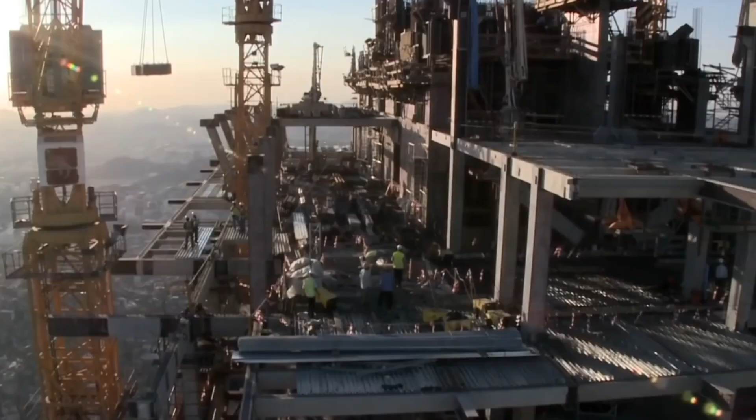The Makkah Royal Clock Tower isn't just a hotel, it can't be. It's located in the heart of one of the most culturally significant cities in the world. Every year up to 3 million Muslims travel to Mecca to complete a pilgrimage known as the Hajj. Those completing the Hajj circle around the Kaaba 7 times. It's an ancient ritual that every Muslim must complete at least once in their life.

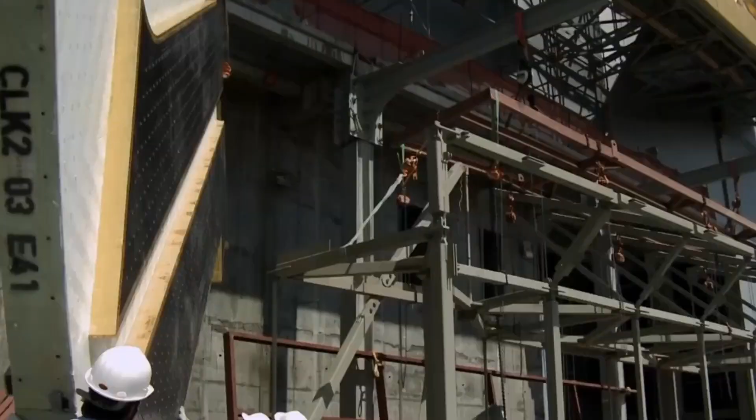This site is thousands of years old, extremely delicate, and constantly crowded. And just a few hundred meters away, across the road, was where this enormous hotel was to be built. This is far from a simple construction site. It's right in the center of Mecca city. You know, inside the first ring road, which is really the most congested area in Saudi Arabia, then the center of Islam. All Muslims want to go there. You have the holy mosque with the Kaaba in the middle and right opposite.

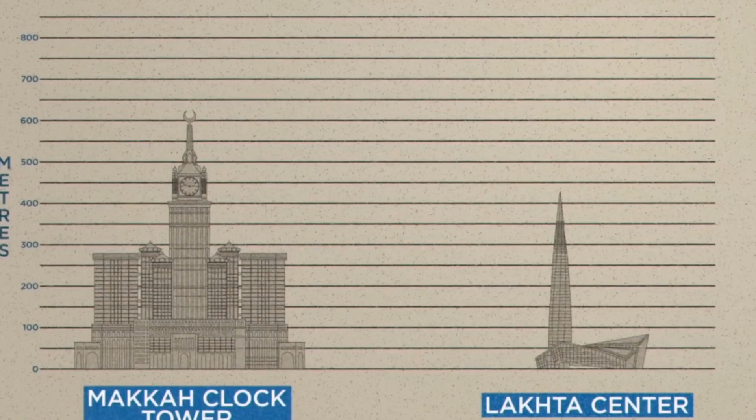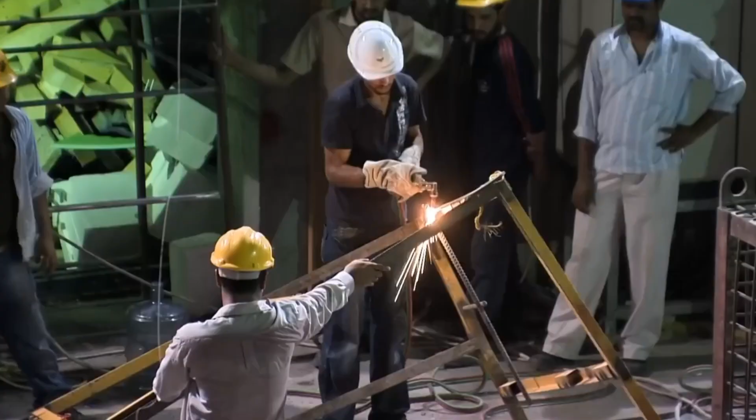The religious tourism market is the second largest source of income for Saudi Arabia after hydrocarbons. It contributes some $12 billion annually to the kingdom's economy. This means that Mecca has the largest number of hotel rooms in the Arab world, far surpassing Dubai. It really then comes as no surprise that this enormous hotel would be constructed here.

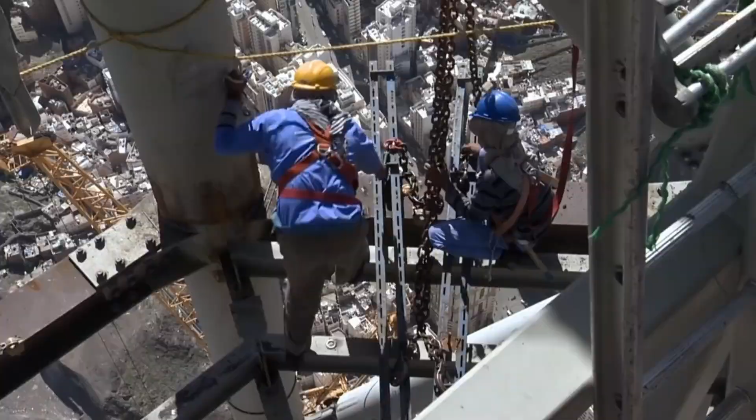Due to the nature of it sitting so closely to the Kaaba and in this very, let's say, sensitive environment, the client reached out to us and wanted to elaborate with us ideas on bringing more meaning to the building. The hotel needed to be more than just a commercial building, because of its location. It needed to be something spiritual. We started thinking about what such a building could stand for. And then one of the ideas that was created in those several meetings and brainstorming was that the main tower could function as the minaret of Mecca.

It was planned and would have been the highest building in the world. The hotel was originally supposed to be only 450 meters high, which would have still made it the tallest building in the world at the beginning of its construction in 2002. Upon deciding to transform it into a grand minaret, the height was then extended to 600 meters. Burj Khalifa was not built yet. It was also in planning, and they, of course, once it was clear that this tower would be 600 meters, they raised theirs to 800 meters and took the record for that one.

But making this hotel into an enormous minaret wasn't enough. The client wanted even more. Of course, timekeeping is essential. There's 5 prayers during the day in Islam, and they all happen to a certain time. Time plays an important role in Islam. There is, of course, the call to prayer that happens 5 times a day. The adhan is the first call to prayer and is usually made from the top of a minaret.

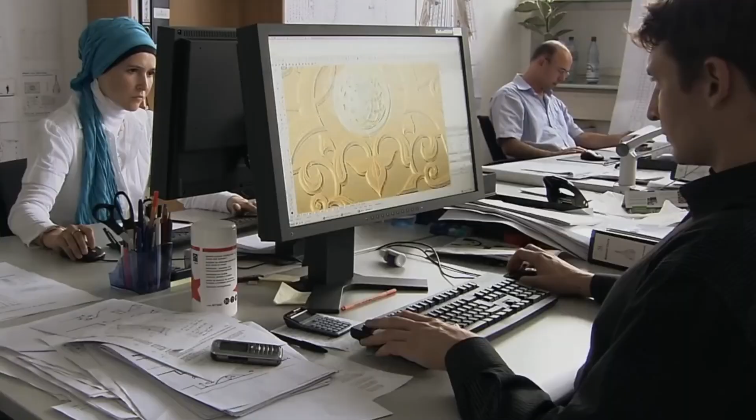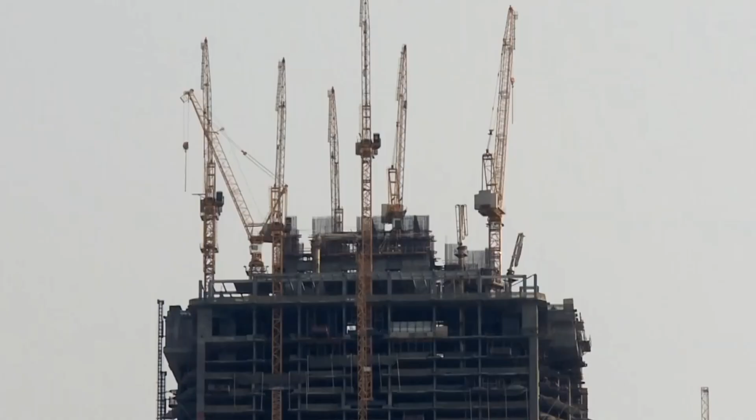The idea of then making this building into a clock tower as well came very naturally. This clock would establish a new second time standard in addition to Greenwich Mean Time. All over the world Muslims would be able to know the precise atomic time in Mecca. This would allow Muslims to begin holidays and special occasions like Ramadan simultaneously, regardless of where they are on earth.

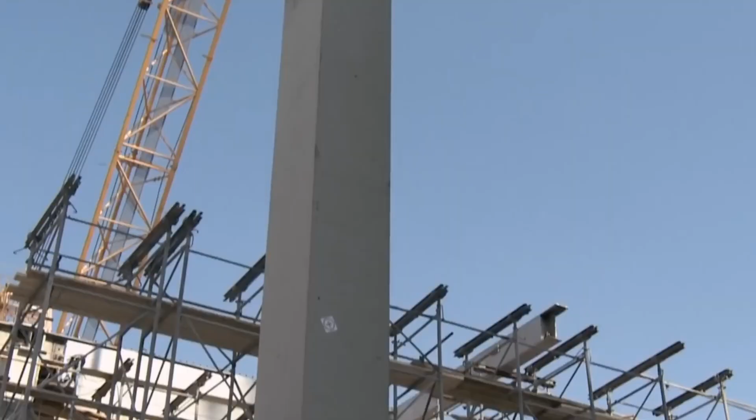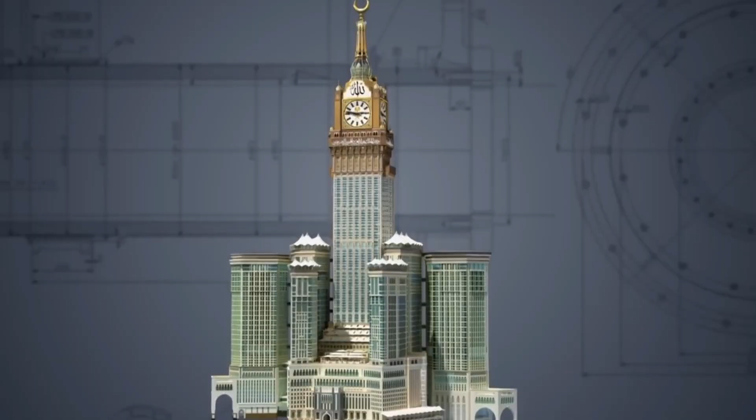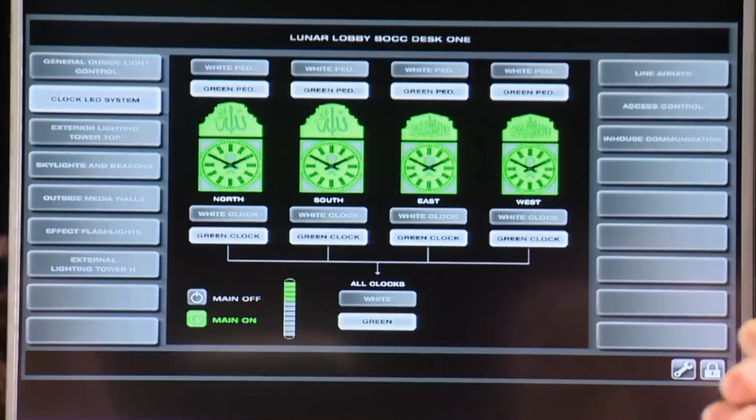There was just one huge problem: half of the building was already built. By the time the Saudis wanted to extend the height and add the clock tower, half of the hotel was completed. This meant the foundations were well and truly laid into the ground and had been designed to accommodate a 450-meter high skyscraper above them, not a 600-meter one. This limited the weight of the building to just 82,000 tons. For contrast, Shanghai Tower, which rises to a comparable 632 meters, weighs 575,000 tons. So we went into checking the foundations.

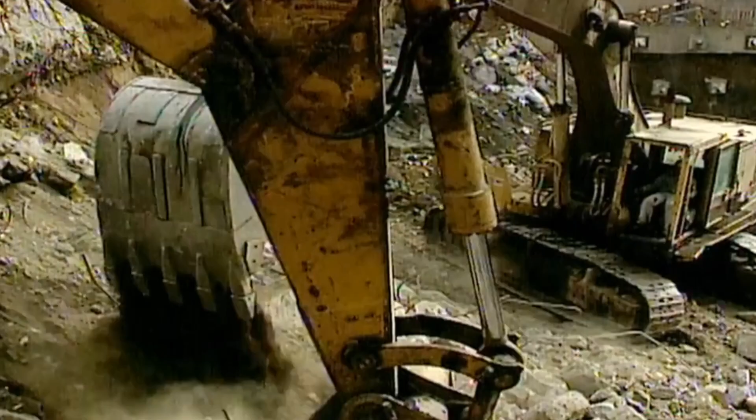How were the foundations laid out? How were they calculated? What forces were they allowed to hold? And we saw that they have a lot of reserves. And that's the typical measure in Mecca, that all the buildings have a lot of reserves, just for the sheer fact that there are so many people moving through the city and they want to be on the safe side.

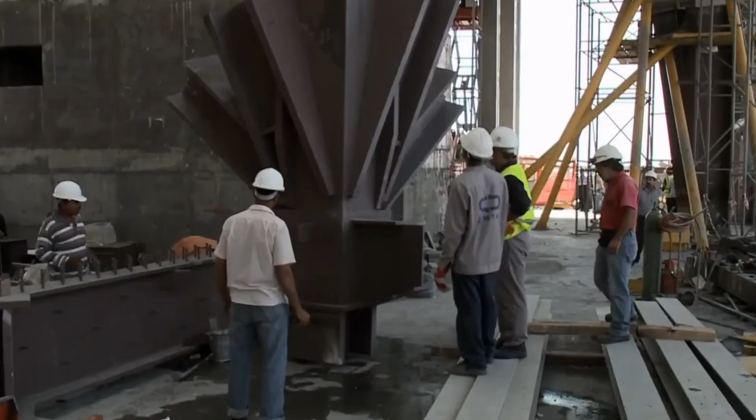We started developing, then, an ultra-lightweight structure that could be placed on top of this concrete tower. The engineers and designers needed to create a tall, lightweight, but strong structure to put on top of the existing hotel. Fortunately, history had already solved this problem.

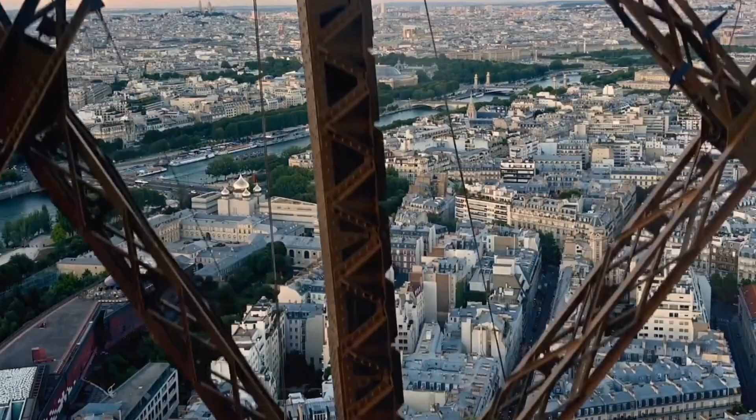Rewind the clock to 1889 and Gustave Eiffel was planning to build the tallest man-made structure in time for the World's Fair. To build it high and fast, and to ensure it didn't sink under its own weight, he came up with the now iconic wrought iron framework structure. This allowed the tower to soar to new heights and redistributed its weight downwards to its base.

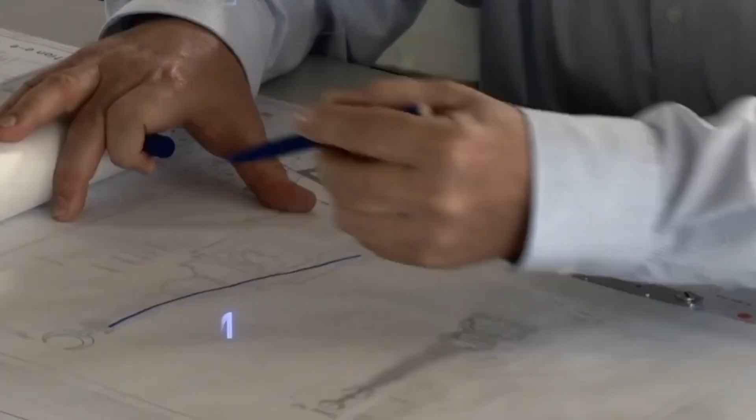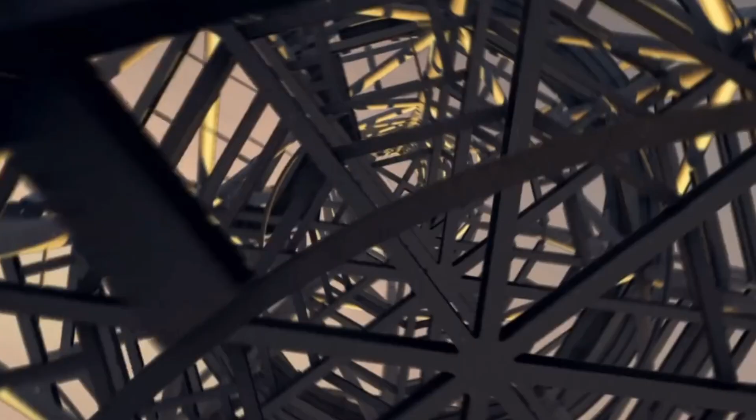The engineers of the clock tower began sketching their design by placing the Eiffel Tower on top of the existing hotel. They used high-strength steel and concrete instead of wrought iron, but kept the idea of a framework structure that grew more slender as it rose, like the trunk of a tree, and kept the same engineering principles from the Eiffel Tower. They would then build their clock and minaret around that framework structure. This lightweight structure was then placed on 5 transfer slabs on the top of the hotel.

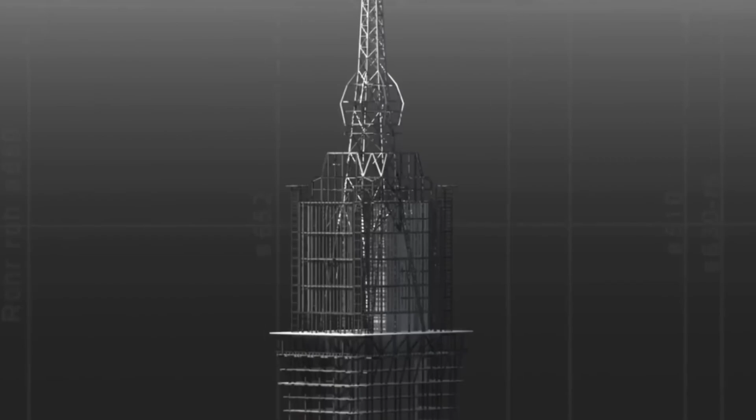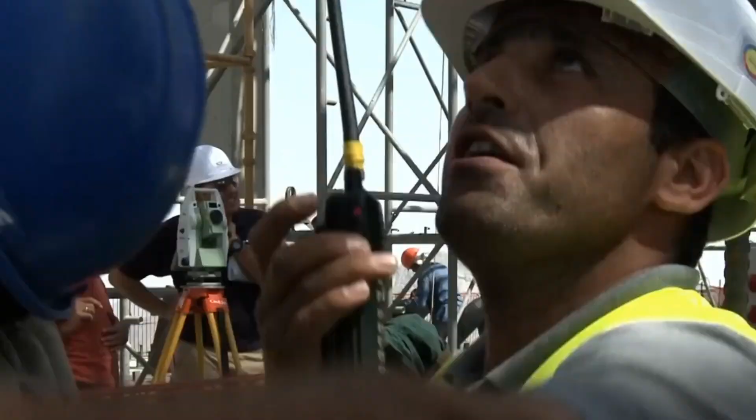There were of course a number of limitations that came with this approach. The distance between floors, for example, had to be far higher than normal. I mean, behind the clock, one floor level is about 12 meters. You could not go with typical floors, the weight would have been exceeded. And then also the floors are cut out. There's a big void in those floors.

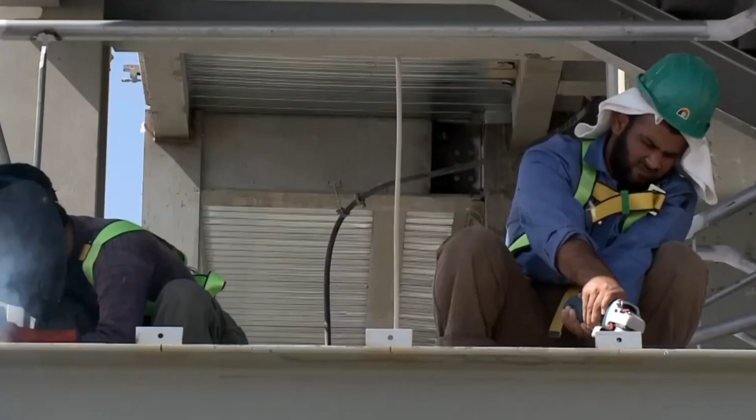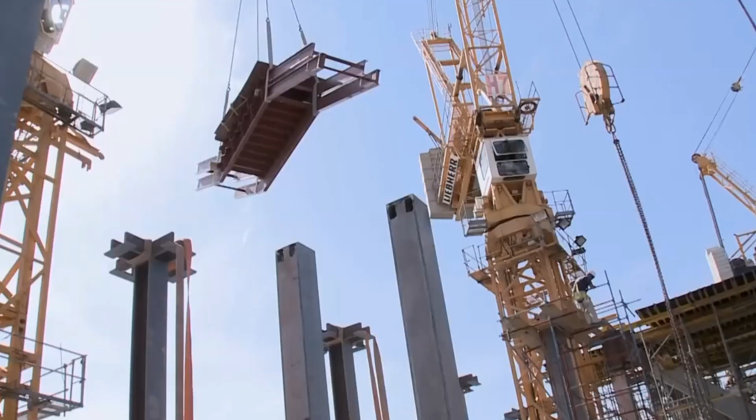The voids, which made the floors weigh less, were then incorporated into the design and used to display large exhibits and artworks. So it works well with the exhibition, but that was actually all the reason to reduce the weight of the building. With the structure worked out, it was time to turn their attention to building the world's biggest clock. The architects of the tower worked with Perrot, a German company that had been designing clocks since 1860.

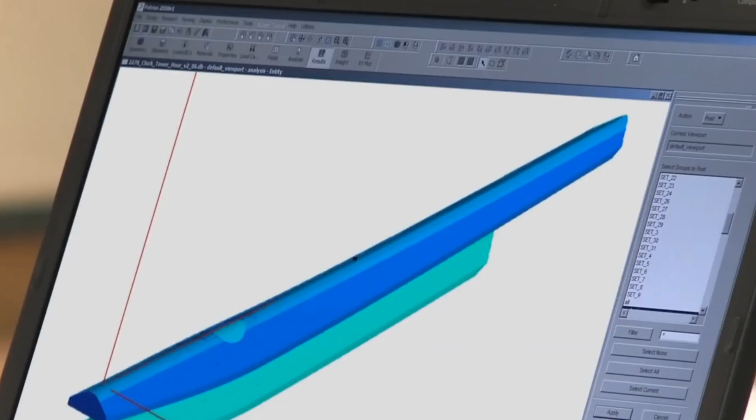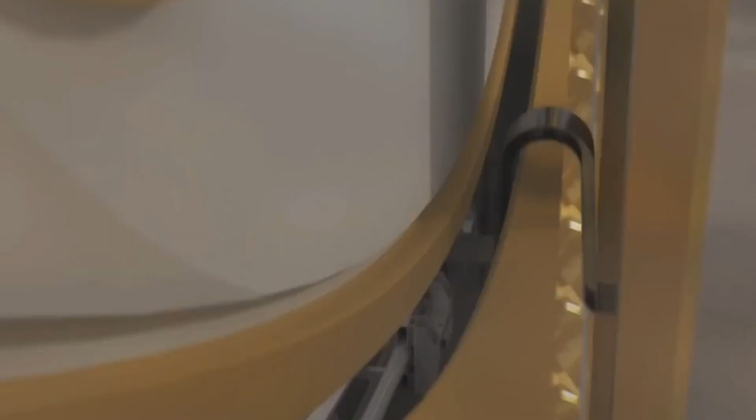There were a lot of different design iterations that went into the clock mechanism, the clock hands. How do you operate such a big clock, especially that high? The clock hands were one of the biggest challenges. Because of the size of the clock and its immense height, the first challenge was figuring out how to keep the hands from blowing away in the wind. A number of designs were considered, including having the tips of the hands guided by a peripheral track, similar to how a Ferris wheel works, or a roller coaster.

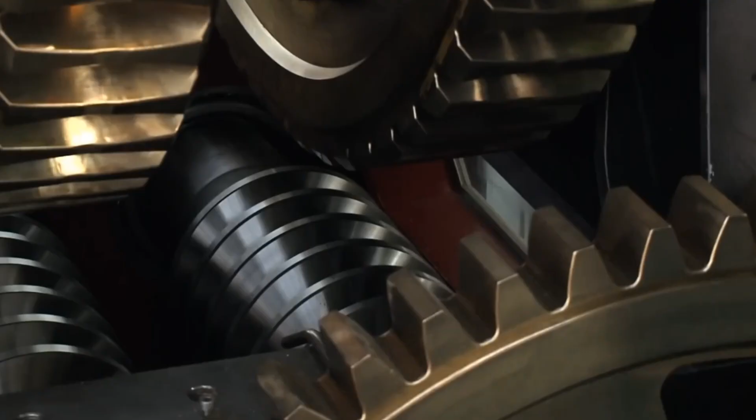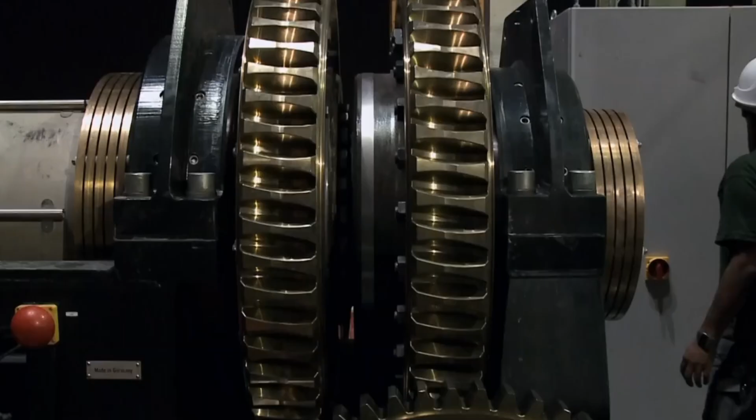Unfortunately, it was discovered that this idea would be too heavy. It also had too many moving parts that could malfunction and would eventually need replacing. You would also see the track underneath, ruining the facade. But we didn't like the idea of having a slit, a circular slit around the facade, Delisi continued. They needed something lightweight and simple. It was decided the hands would be made of carbon fiber and they would be controlled by a centrally installed clock drive that could hold both of them.

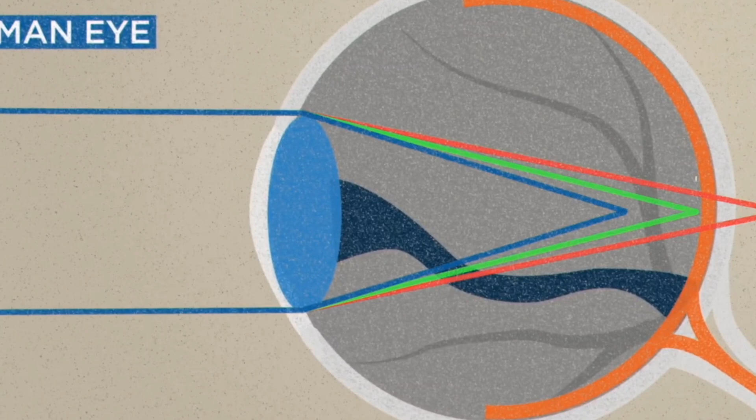The hands themselves measured 23 meters and 17 meters respectively. For comparison, Big Ben's hands are 4.2 meters and 2.7 meters. With a fantastic team of engineers, we found out that we could use a special carbon fiber to make this clock and cantilever it. So we have this 23-meter long clock which is completely cantilevered. Of course they have counterweights on the other end to balance.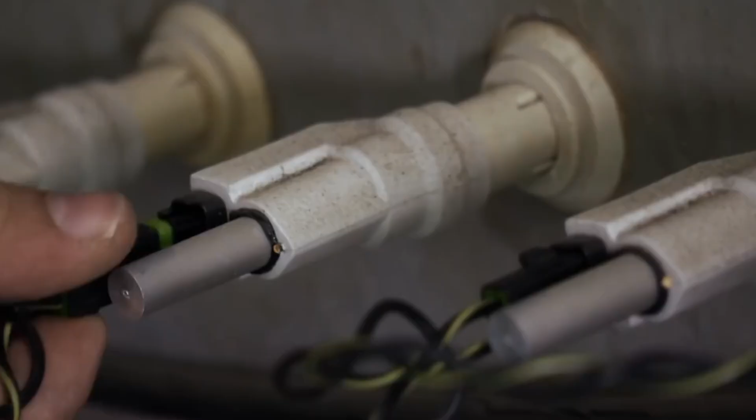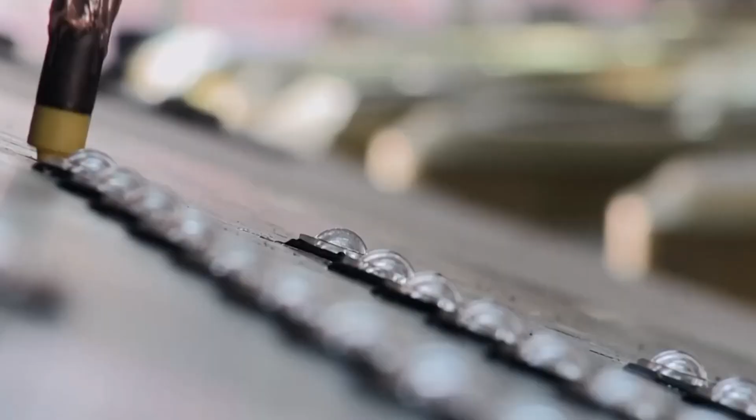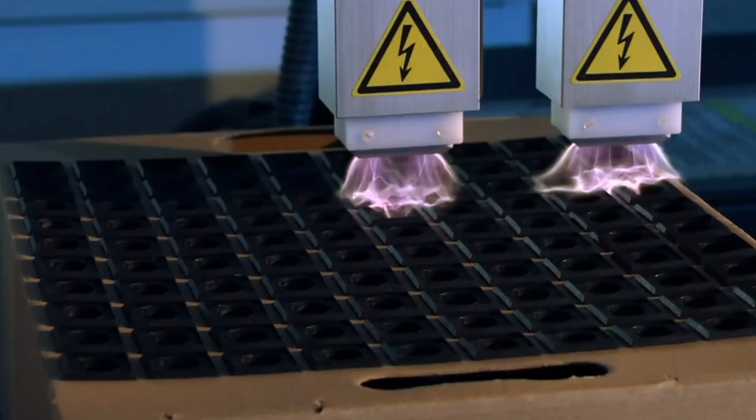The wind pressure on this gigantic clock face was also tremendous, not just on the hands, but also on the facade. The clock face was designed to be slightly concave to shield the hands from the wind, which at this height could reach up to 200 kilometers an hour. The concavity of the clock was in order to keep the clock hands within the profile of the building and not outside the building profile, so that's why you have this, added Delisi. There are 4 clock drives, actually 5. The 5th one was also put up on the platform floor as a spare, explained Schnell.

And we also have a spare set of clock hands. They are so big that you can actually access them and walk in them. At least it can be done quite easily. You don't have to build a scaffolding that goes 500 meters high.

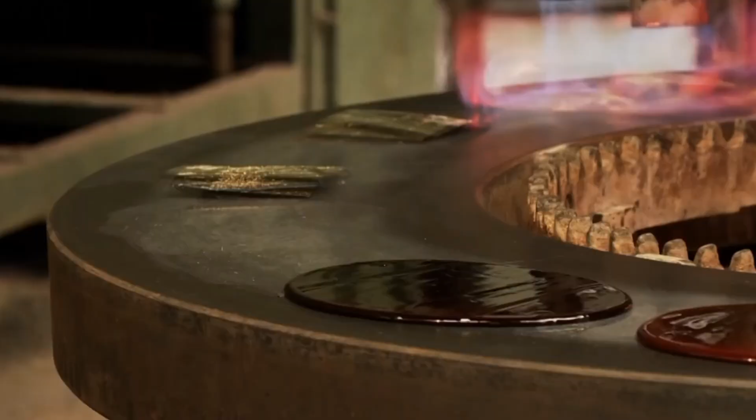The designers conducted a number of tests to figure out the colors of the clock. It was especially important to work out how it should be lit up at night so it could be the most legible. The obvious idea, let's backlight the facade. But that was directly dismissed because you would lose definition of the architectural details.

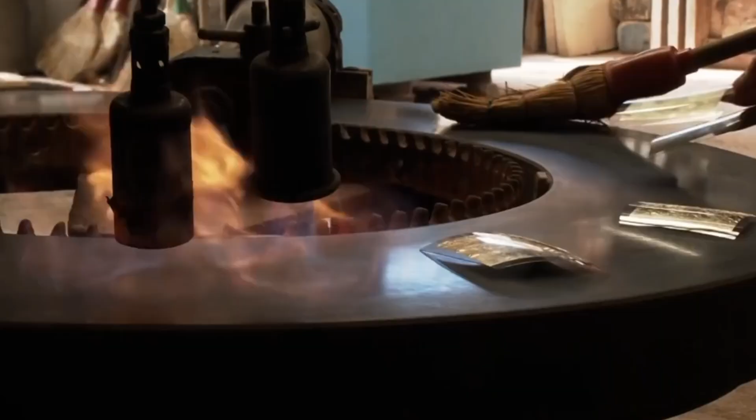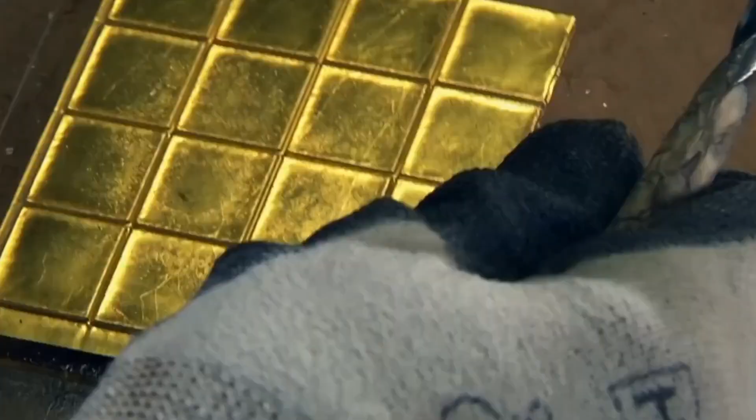After several trial runs under different weather conditions and with different color combinations, it was decided that instead of black and white the clock face would be green and white and that LED lights would be used. Green and white was chosen because of how the human eye works. When green light refracts in the eye, it focuses on the image plane of the retina, creating a sharper image. These color combinations would ensure the clock face could be seen clearly from more than 8 kilometers away.

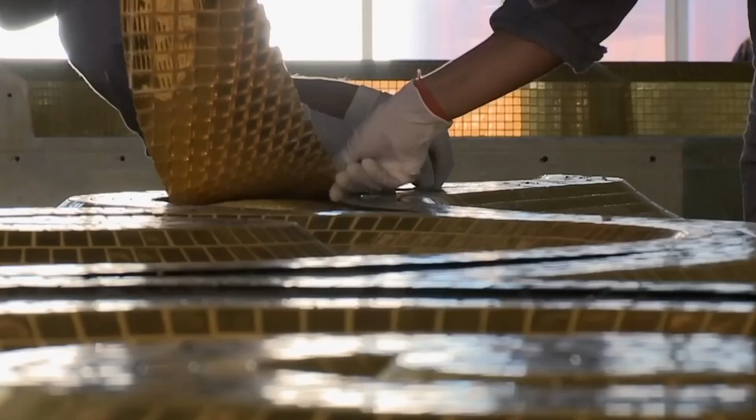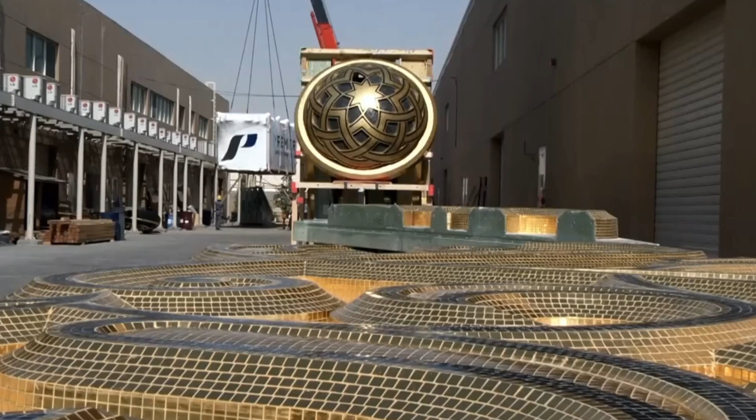LED lights would illuminate the clock face. Each LED pixel was installed 105 millimeters from the next one so that from a distance it would appear as a single green surface. More than 2 million LEDs would illuminate the tower in total. These LED lights were also specifically developed for the task, explained Schnell. And we took about a year, I think, till we finally were happy with the outcome.

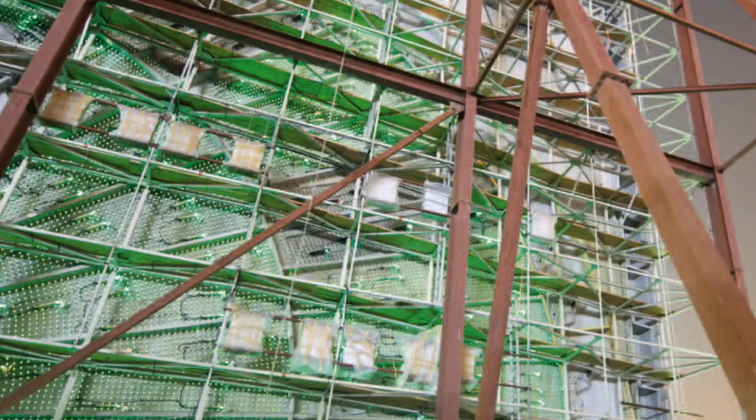The problem is that if these LEDs get very hot, their lifetime is reduced dramatically and we have a hot climate. The problem was to find the right casting as a cooling body for the individual LEDs. But somehow they seem to last quite well. So we are happy with that.

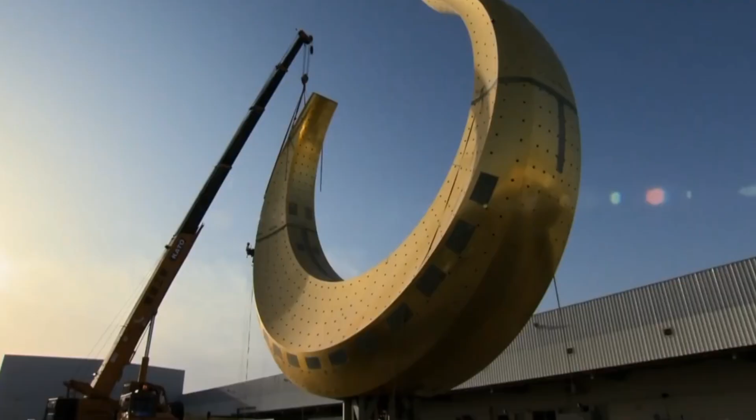Keeping with Islamic traditions, the facade of the tower is covered in 98 million mosaic tiles, each measuring 20 by 20 millimeters. The glass tiles came in 13 different colors, 1/3 of which contained 24-karat gold leaf. The order for the tiles was so immense that the Venetian company producing them had to invent a new way to automate the process just so it could get done.

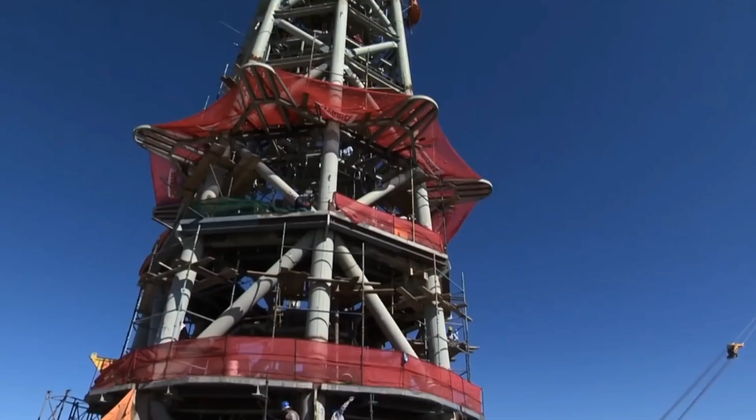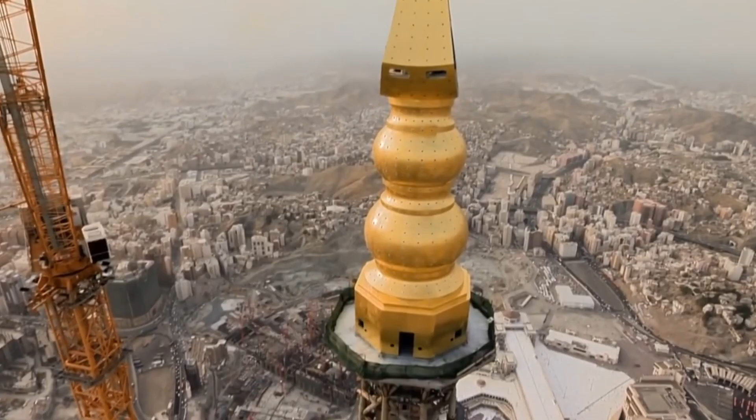This is a very good company that was chosen for their quality. But at that time, the particular gold tiles were manufacturing an amount of 15 to 20 square meters a month. And we were in need of 250, 300 square meters a month to catch up with the construction. We developed with them a robotic system.

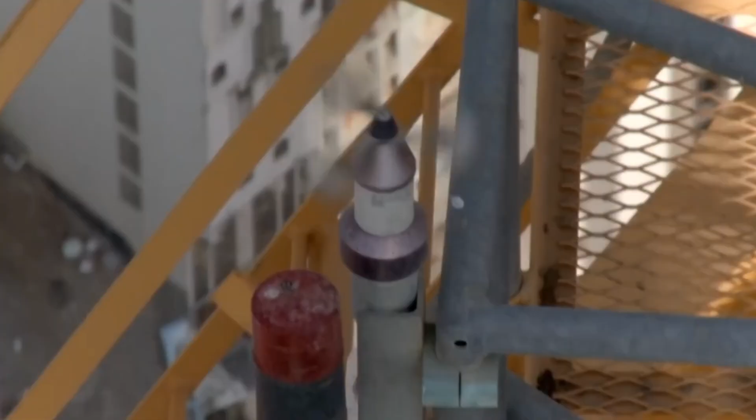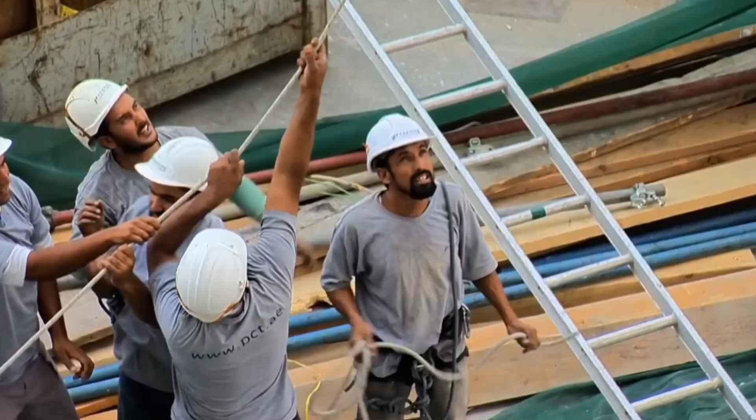The tiles themselves had to be rigorously tested to ensure they would withstand the extreme weather at the top of the building. Everything has been tested in lab, also physically, weather, outside and fire tests, and all the possible tests were made. Much of the tower was prefabricated in Dubai, a city that knows a thing or two about megastructures. The 98 million tiles were sent here and put on the facade piece by piece, all by hand. More than 100 men worked on the mosaics and only the best, most flawless tiles were selected.

These finished pieces of the facade were then broken down and taken across the desert in trucks in a 3-day journey to Mecca, where they were reassembled. The clock face itself was also built in Dubai first so they could see what it would look like firsthand. This was done partly to test the structure, but also because many of the architects and engineers working on the building could not travel to Mecca themselves to see it finished. This allowed them to make any necessary adjustments.

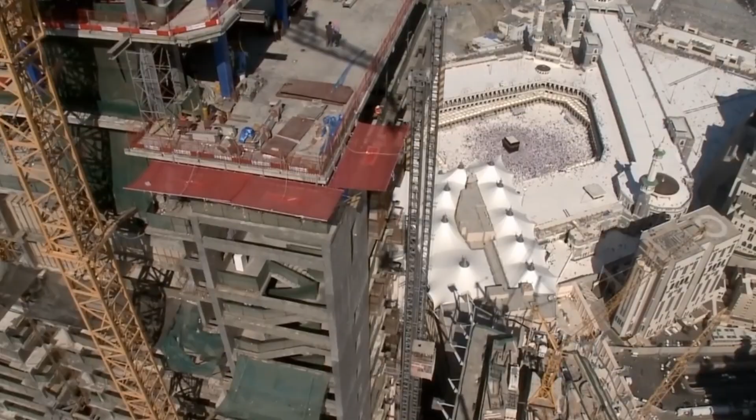We had the test ground in Dubai. We had to erect a quarter of the clock, complete, full. And so we had to rebuild the main structure. It too was then dismantled and sent to Mecca. The very top of the tower was also prefabricated in Dubai. This crescent moon-shaped structure would reach for the sky and house the highest prayer room in the world.

The crescent bit is a half moon. That is a typical element that is put on top of the minaret. And this identifies the building as a minaret. The crescent itself is the biggest carbon fiber structure ever built.

It contains 3 floors with the prayer room, a meeting, and an office. Finally the time came to lift the prayer room to its place at the top. It had been severed into several parts so it could be trucked to Mecca. There was just one problem. Where the prayer room was to be lifted was so high, the crane could not reach it.

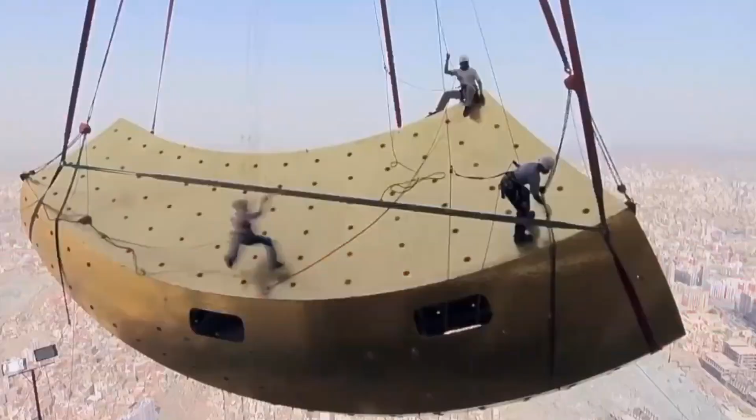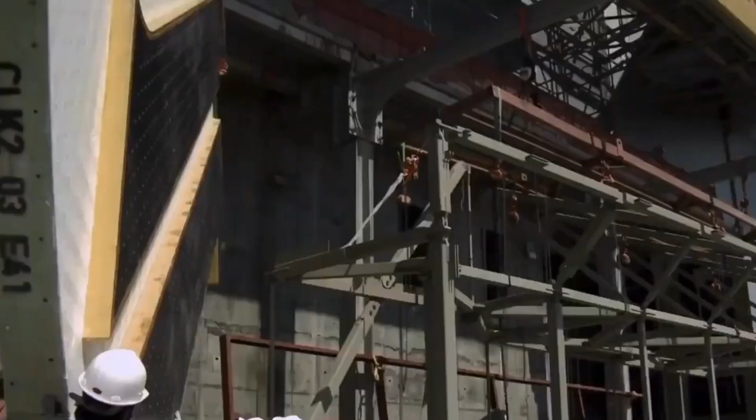There's a spiral stair that goes through the spine of the crescent. And a friend of mine and myself, we always went up that spiral stair to take a break, went there to smoke a cigarette. And it was beautiful. You know, you sit. There's nothing around you. And we knew, okay, from the program that the crescent will come in within the next 2 weeks. And then we looked on the tower and said, it's a bit weird that the tower crane was only then reaching with the tip kind of that platform.

With very limited time left they had to raise the crane to its absolute limit. The tower crane was then at a height of 220 plus meters and then quite a heavy load on it. The one segment of this crescent was 7 to 8 tons. The capacity of the crane got to its limit because of the height, I mean, everything was at that limit. The height was just enough. The capacity, the weight of the crescent was exactly on the limit of the crane.

Then came the wind. 600 meters above the ground, riggers strapped into harnesses, some on the structure, others on the tower, braced themselves against incredibly strong winds. The crescent soon began spinning out of control. Yeah, I think 2 or 3 guys really got sick. They just got sick, because it was rotating.

The men on the viewing platform had to use ropes to steady the structure and bring it into place. The poor crane driver, I think he was going nuts because on the walkie-talkie people from down were yelling at him. But they managed. It took quite a while longer than anticipated. With the prayer room in place, the tower was topped out. To this day it is still the highest occupiable space on any man-made structure.

The Burj Khalifa's highest occupied floor is at 585 meters, while Shanghai Tower's is 583 meters. Both pale in comparison to the prayer room 600 meters above Mecca. Then we had the opening ceremony where the king actually came to Mecca, and he pressed the button to turn on the lights. And that was a great moment. That was really good. I mean, it's like 3 years of hardcore pressure and stress and it all came to a success. It was a great moment, one of the best moments in my life, that's for sure.

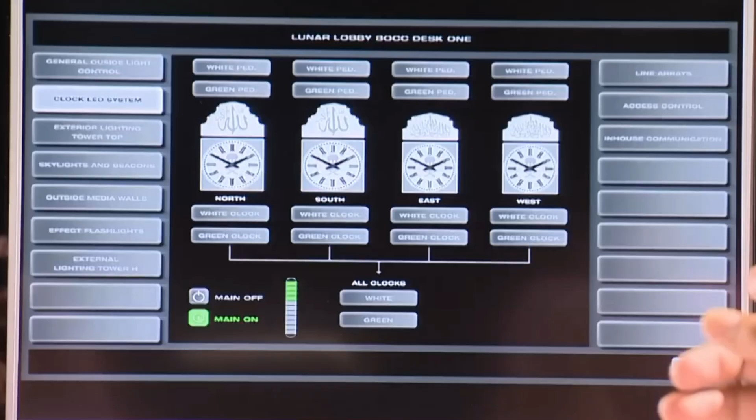It's the only tower that gives its own time signal. There is a time signal now available for all Muslims worldwide. Anything which is for unification purposes these days is good. I think that's very important, and that may be the real value of this structure. Despite shattering so many records, the building is little known in the Western world.

At the beginning, I was a little bit disappointed. I managed to understand that maybe it's even a good thing for the building, because in contemporary architecture, the building is not even finished and it is already in the magazine or on the internet. People talk for 1 month and then it is forgotten. So I assume this building is really slowly metabolized by the city, is becoming an icon, and slowly will become, in time, an essential building.